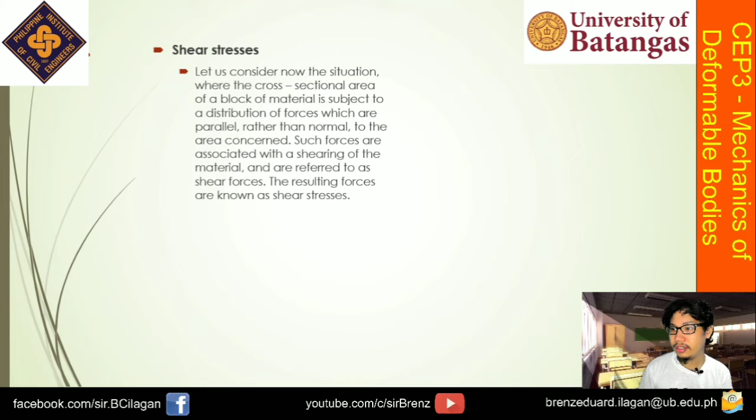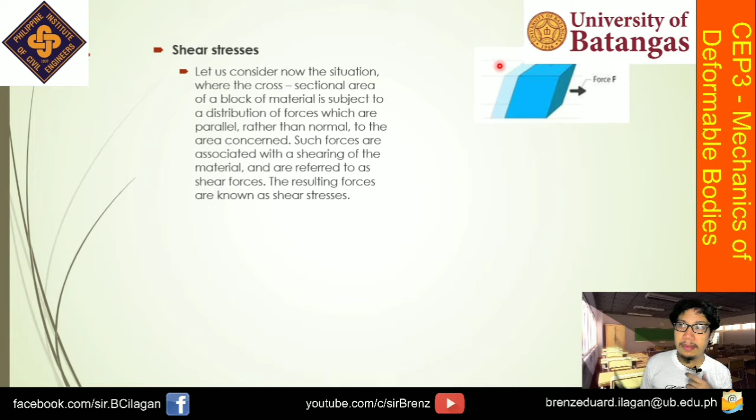Okay, so what this means is that our force should be parallel to the direction or to the cross-sectional area being considered. So the indicator here, remember for normal stress, the area we consider is perpendicular. So when we say perpendicular, it's at 90 degrees. But this time, the force and the area are parallel.

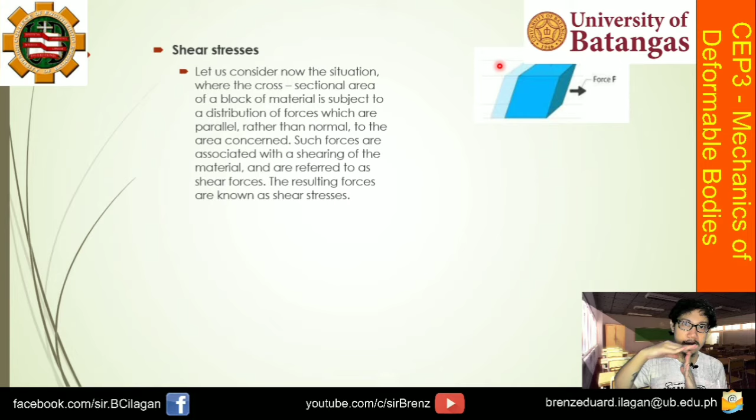So as I mentioned in the previous video, this is what you need to keep in mind: remember that your force and area are parallel with each other. So for normal stress, it's perpendicular - your force and your area produce 90 degrees. This time, they're parallel, 0 degrees, acting along the same axis.

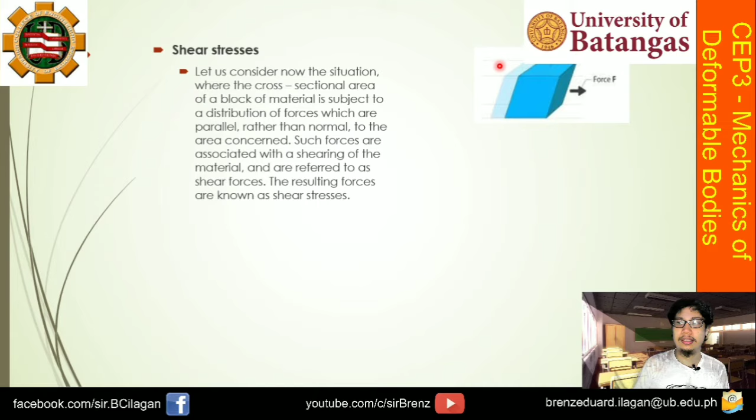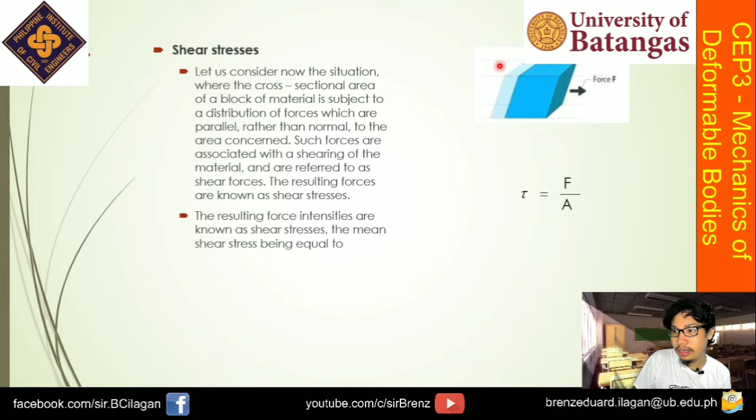So that's the only keyword there. The resulting force intensities are known as shear stresses. The mean shear stress being equal to... so this time, the formula for shearing stress is denoted by the symbol tau.

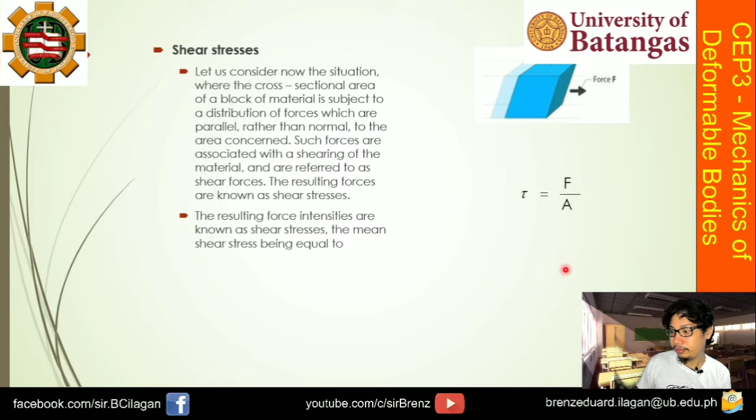The fancy letter T. And that is equal to the force, or the shearing force F, over A. Anyway, this F depends on how you designate the force that is parallel to your area. Where F is the resultant shearing force, which passes through the centroid of the area A being sheared.

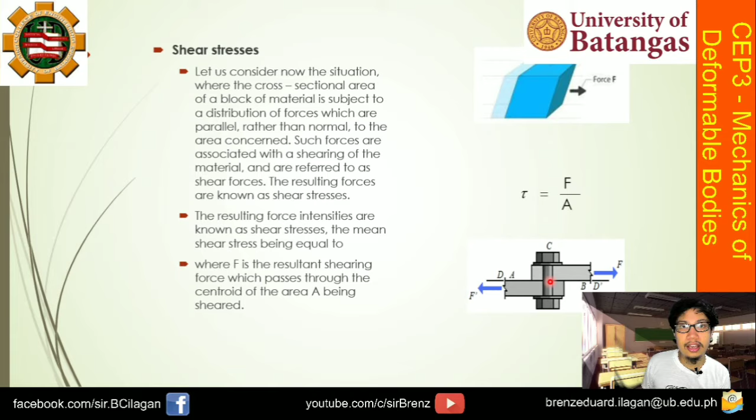Okay, so here we have a plate connected by a rivet. And as shown here, you have a force F here and another force F here. So if you consider the bolt, the area sheared here is the middle part. So it's circular, then the shape of the cross-sectional area affected by the shearing force in our rivet is the area of a circle.

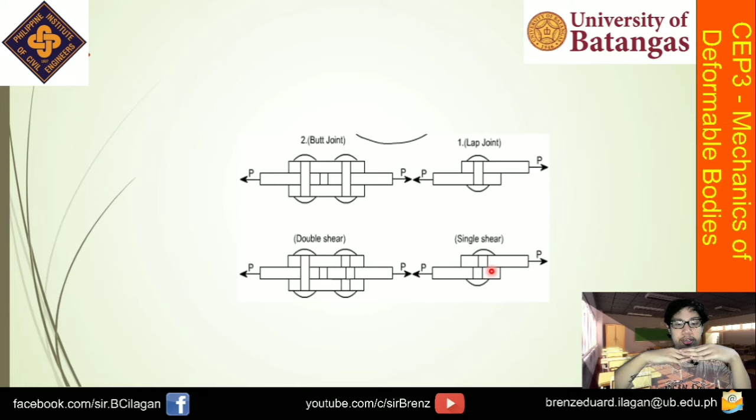So this falls into the category of single shear because if we consider the plate and also the bearing, the part that is sheared between them is just this one. So in our diagram, this is it. That's why it is considered single shear.

When it's double shear, for example, we have here a butt joint. If you notice, you have a plate. So the plate in the middle is sandwiched, or covered, by two plates on top. You can see here this portion, then this is the area that is sheared in our butt joint.

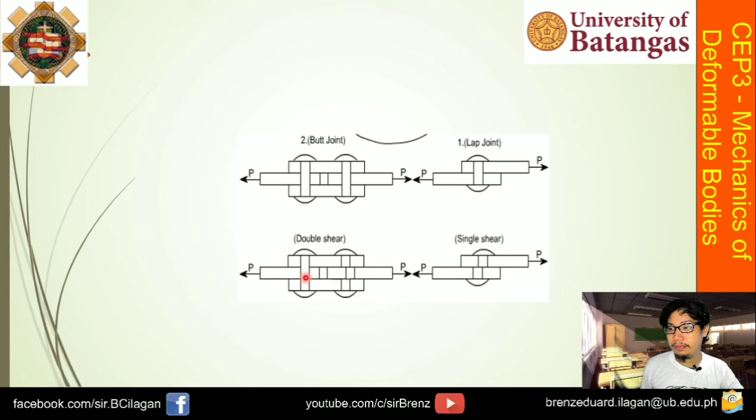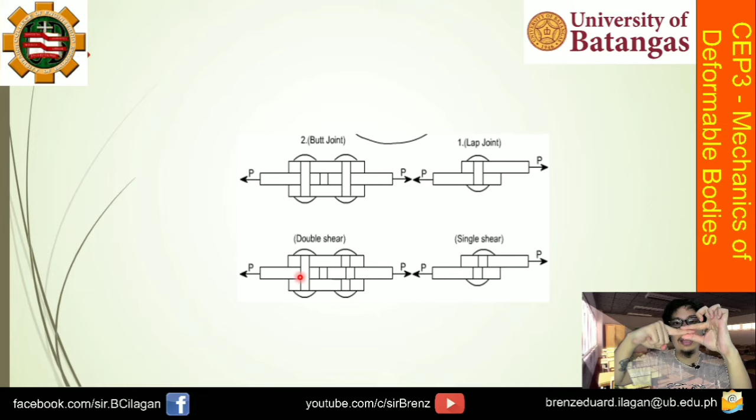So for example, this is your single plate and then you have one plate on top and one plate at the bottom. So the area sheared is this one, plus the bottom one. That's why it's under the category of double shear.

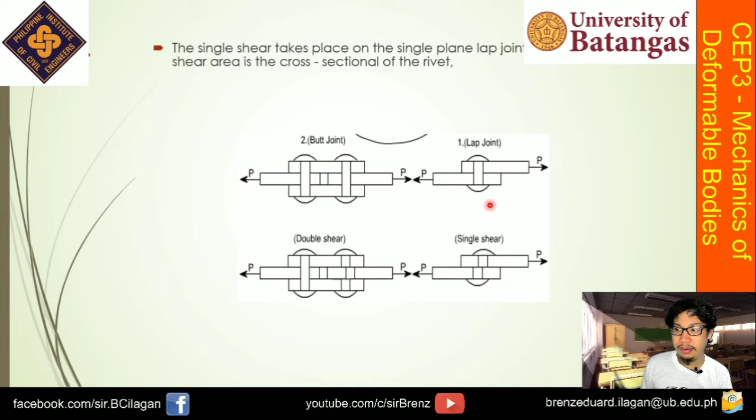Okay, so the single shear takes place on the single plane lap joint, and the shear area is the cross-section of the rivet. Whereas the double shear takes place in the case of a butt joint of rivets, and the shear area is twice the cross-sectional area of the rivet.

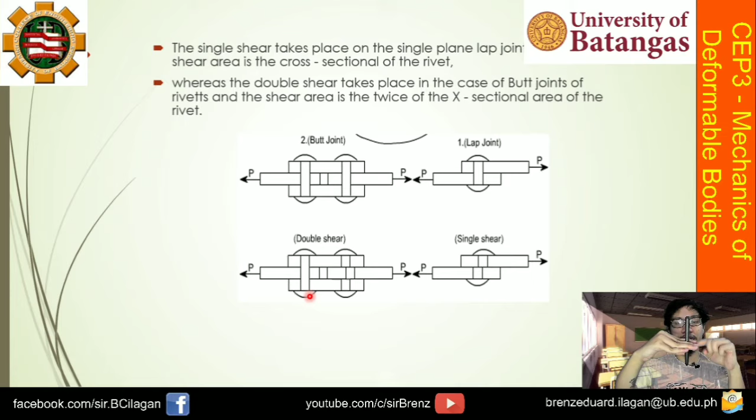So if you're considering the rivet that connects your butt joint - let's say this is the pen representing it - if you consider the rivet, the area where you have shear stress is this top part and then the bottom part, that's double shear.

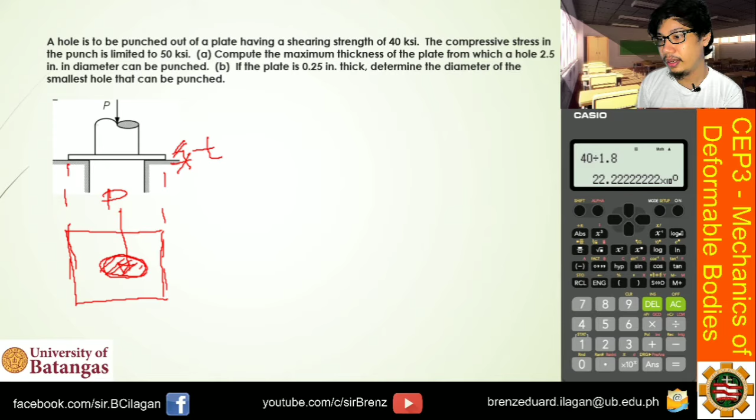Okay, so again, let's determine the unknowns. Again, the given here is the shearing strength or the shearing stress, which is equivalent to 40 KSI. And then the compressive strength of your puncher is limited to 50 KSI.

So again, recall our guide for normal stress - normal stress has two kinds, compressive and tensile. The area considered here is the perpendicular area. Then for shearing strength, that is the parallel area, considering the force P.

Let's do letter A first. So the required in letter A is the maximum thickness T. Okay, so let's write down the given first. So we have the compressive stress of 50 KSI.

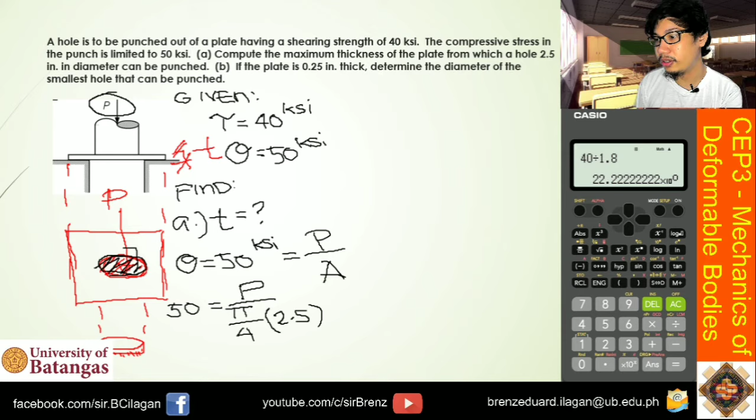So to get that, that is equals to pi over 4 multiplied by the diameter squared. The problem states that the hole is 2.5 inches in diameter that can be punched, so that will be the diameter of our puncher - pi over 4 times the diameter squared.

So with that, we can find the value of P. So again, using calculator - so 50, let's set this up. So 50 times the area of the circle, so pi over 4, pi divided by 4, times 2.5 squared.

So that equals 245... 0.4369... 0.43. So that is force P.

Okay, so since we have now the value of P, we can now solve for the thickness. So again, our shearing strength, where can we apply it? The shearing strength is equals to force P over A. So where do we get A? From the area we consider, the area parallel with respect to the force P.

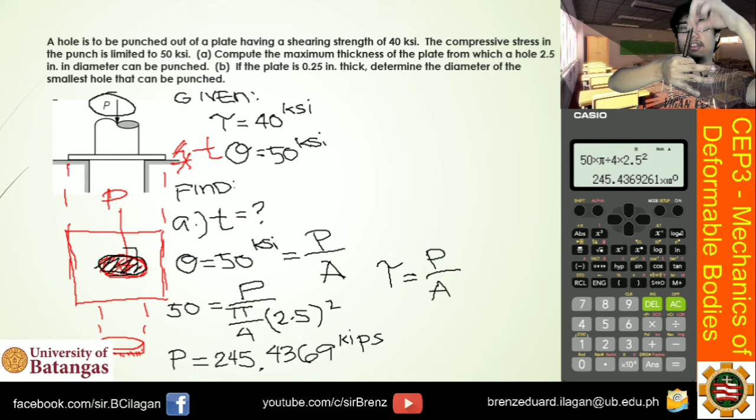If you notice here, let me use my pointer. This is our sheared area. Like a coin, the edge with the grooves - that's the best representation for this problem. So that's the part of the plate that gets punched out. How do we get this shaded area? It's just like the surface area of a cylinder, or for this example, the edge of the coin.

Okay, so to get that, it's perimeter times the thickness, right? So again, our shearing strength is limited to 40 KSI equals the force P, which we solved earlier.

So I can't fit it all here. So force P over A, and again that's just the perimeter of the circle. How do we get the perimeter? That's just equals to 2 pi r, where 2r equals d, or pi d. So your diameter is 2.5, times the thickness. So when we simplify this equation, the thickness T is just equivalent to the force P, 245.4369, over pi times 2.5 times 40 KSI.

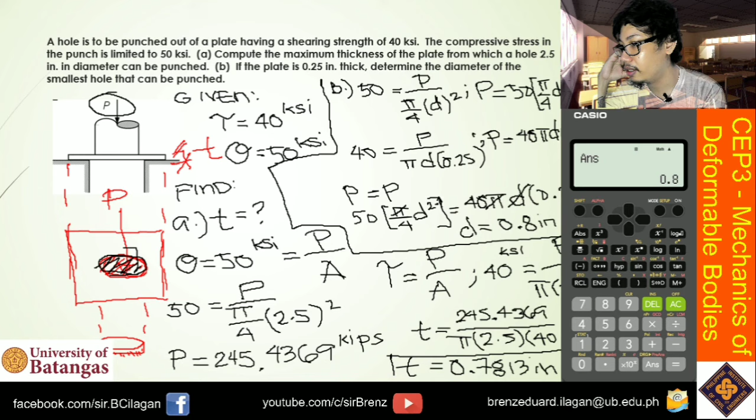So let's now proceed with the next problem.